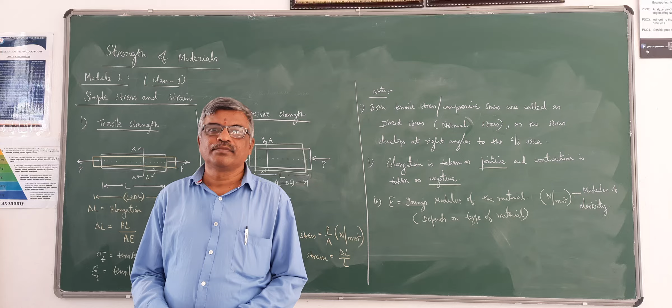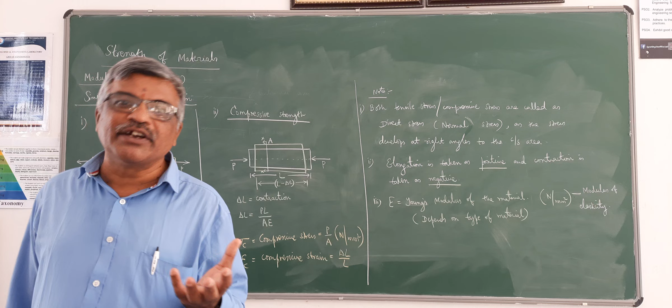All of you know about forces and moments from mechanics. A force is an external agent which tries to change the equilibrium of a body. Whenever a force acts on a body, some deformation takes place. If the deformation is very small, you can neglect it and that body is called a rigid body. If you have to consider the deformation, it is called an elastic or deformable body. In strength of materials, we deal with deformable bodies, finding the stresses and strains induced in a body subjected to some external force.

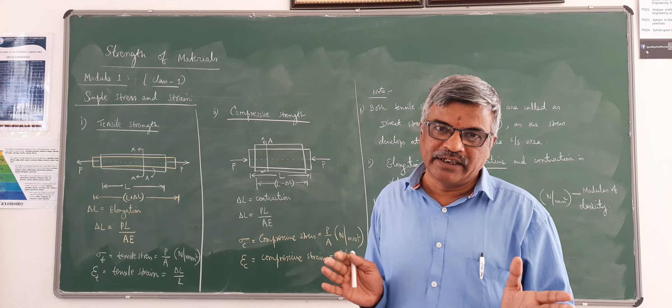The difference between pressure and stress is that stress is an internal effect. When some external force acts on an object, an internal resistance develops within the body, and that internal resistance is known as stress. Its unit is expressed per unit area, force per unit area, which is Newton per millimeter square. Pressure is also expressed in the same units, but in pascals, that is Newton per meter square. So pressure is an external effect, stress is an internal effect.

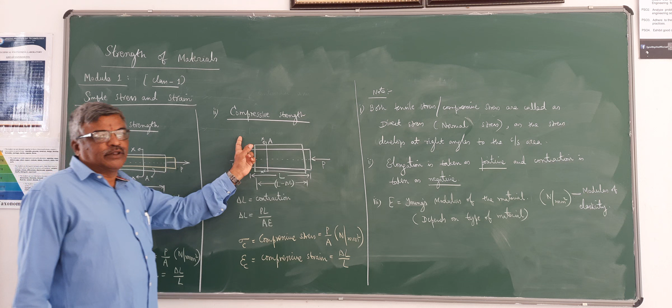In strength of materials, we deal with different types of strength. Today we will take up tensile strength and compressive strength. Tensile strength means when a material is subjected to a tension force, P, which we can call a pull force. This is the material, and the length of the specimen is L.

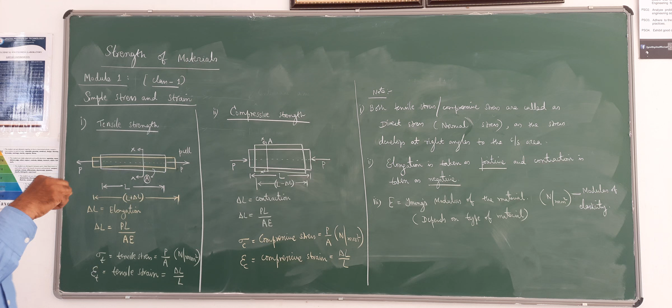When subjected to a pull force P, the tendency is to get elongated, meaning the length will increase. I will take the new length as L plus delta L. Once the length increases, the cross sectional area A, which can be circular, rectangular, square, or any shape, reduces. So when length increases, cross sectional area reduces. Delta L is called elongation, since there is a stretch and increase in length, giving the new length.

The difference is the change in length, called elongation, given by the formula: Delta L equals PL by AE, where P is the tensile force acting on the specimen, A is the cross sectional area, L is the length of the specimen, and E is an elastic constant known as Young's modulus or modulus of elasticity, which depends on the type of material.

This derivation I have given in the lecture notes also and in the video class also. You can refer to that.

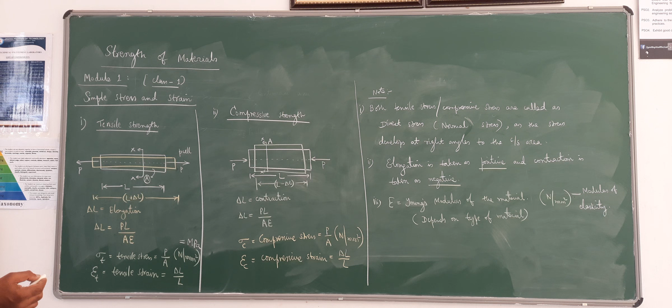Stress, as already told, is the ratio of the internal resistance force to the cross sectional area, normally expressed in Newton per millimeter square, where N is the internal force developed and millimeter square is the area. This is also denoted by MPa, megapascals. One pascal is one Newton per meter square, one megapascal is one Newton per millimeter square. Whatever stress develops due to tension force is called tensile stress, denoted as sigma T, where sigma stands for stress and T stands for tension.

So tensile stress is P by A. Similarly, we define another term called strain. Since tensile stress develops within the body, tensile strain will also develop, denoted epsilon T, where epsilon is strain and T stands for tension. Epsilon T is given by change in length divided by initial length, that is delta L by L. This has no units since both are expressed in the same units, millimeter by millimeter, which cancels out. It is unitless or dimensionless, whereas stress has the unit of Newton per mm square.

This is regarding tensile stress. The other type of stress is compressive stress. When you apply a push force on both sides of the specimen, the reverse effect takes place: the length will reduce, initial length L reduces by delta L, while the area will increase. So area increases as length reduces. This increase in area can be taken as A plus delta A, where delta A is the increase in area.

Now this delta L we call contraction, that is the decrease in length. Contraction is decrease in length. Elongation is increase in length. So that is the word we are going to use.

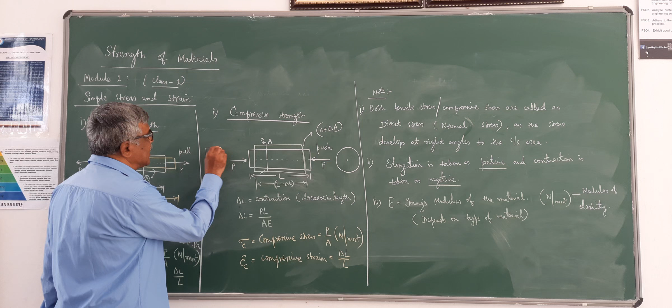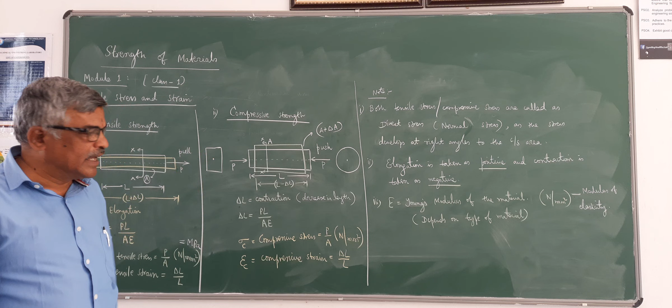Knowing the diameter, you can find out the area by pi d square by 4. Knowing the width and depth, you can calculate the area. Once you know the area, sigma is stress, C stands for compressive stress, expressed as P by A in Newton per mm square or MPa. Compressive strain, epsilon C, is delta L by L, same formula, unitless since it's millimeter per millimeter.

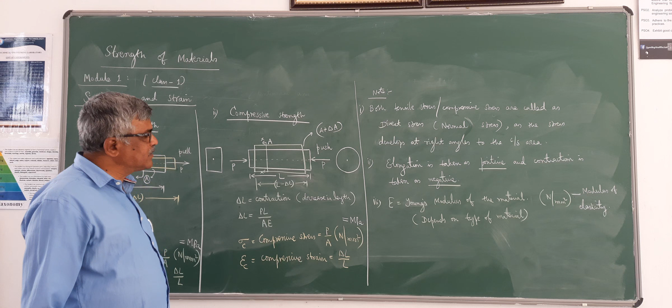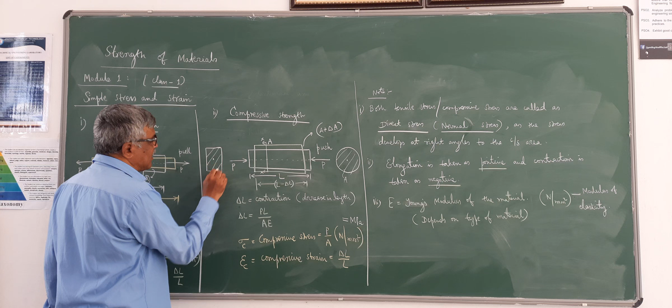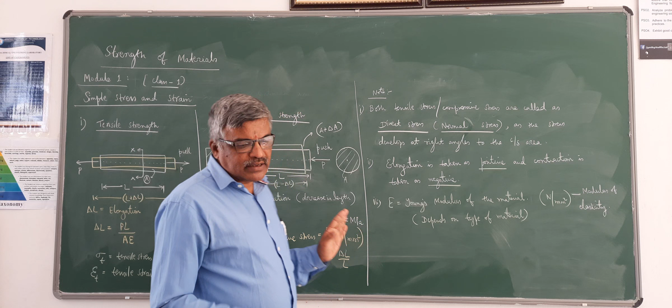In doing problems, we take elongation as positive and contraction as negative, because if you take stepped bars with 3 or 4 bars together, some bars may be subjected to tension, some to compression. For example, bar 1 is subjected to compression, bar 3 is subjected to tension. In such cases, some segments may be subjected to tensile stress, some to compressive stress, and finally you are interested in finding the total elongation, delta L.

Delta L1 is the elongation or contraction in this portion, delta L2 in this portion, delta L3 in this portion, and the total elongation delta L is the summation of delta L1 plus delta L2 plus delta L3. If the first bar is subjected to compression, delta L1 will be negative; if tension, it's positive. For the middle bar, depending on the forces and magnitudes, we have to decide whether it is subjected to tension or compression, and take it as positive or negative accordingly.

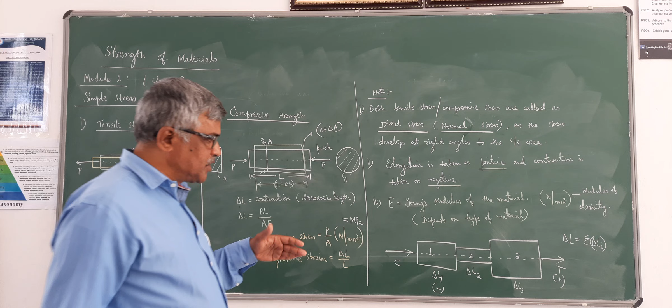So this is how it works. We are going to discuss some problems on this in the next class. These are called stepped bars.

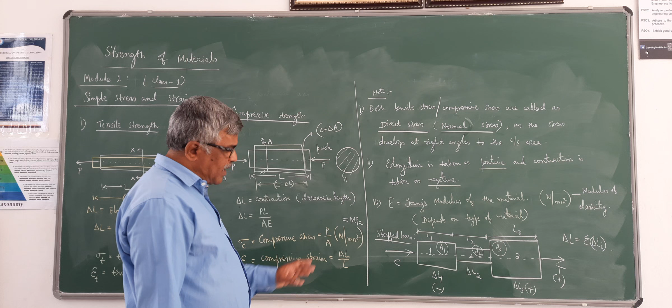In stepped bars, you have different cross-section areas. A1 is the area of this segment, A2 of this, A3 of this. Lengths also will be different: L1, L2, L3 for the respective segments. Whereas Young's modulus value remains same if it consists of the same material, so E value remains same.

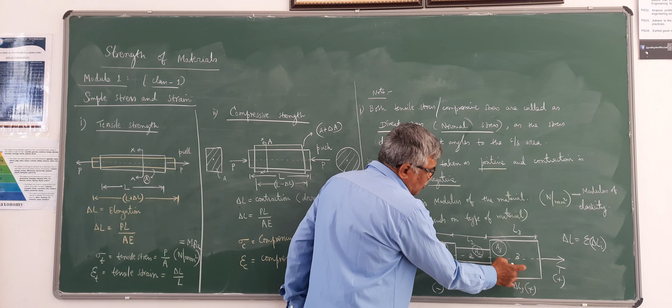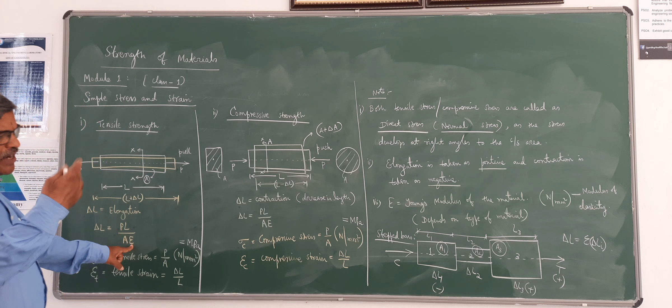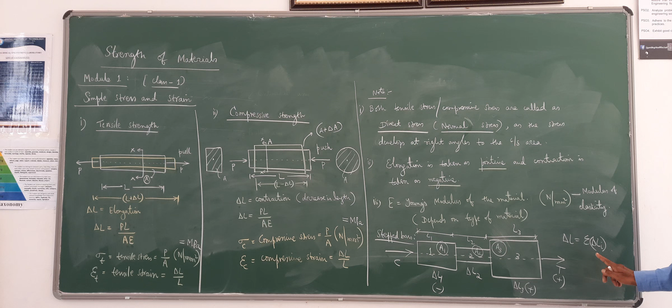Using the formula PL by AE: P you will be knowing, so whatever force acts on each segment is P1, P2, P3 respectively. Then L1, L2, L3 we take for each, and A1, A2, A3 are the areas of these three segments. Young's modulus remains same provided all three segments are of the same material. In the next class we will discuss how to find the total deformation delta L of a stepped bar. Okay, thank you.